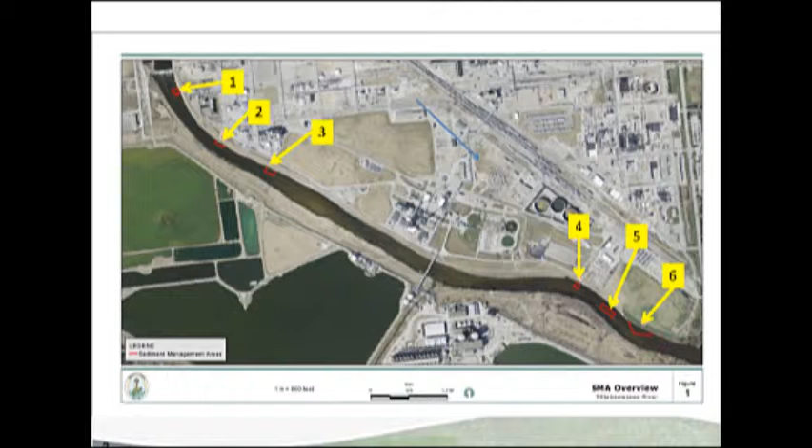There were 6 SMAs, sediment management areas, identified in segment 1 as depicted on this map. For SMA 1, the remedy selection was a cap. For SMA 2 and 3, as well as 6, the remedy selection was DNAPL removal and treatment and installation of physical containment, which was a cap and sheet piling, and then also hydraulic controls. And SMA 4 and 5 were also cap selections.

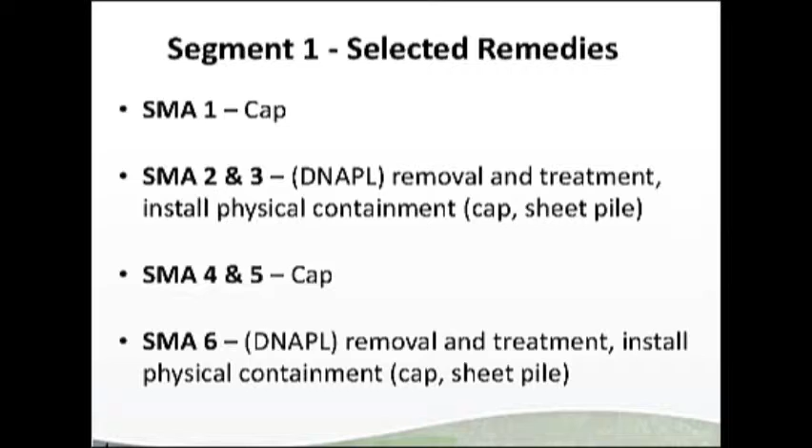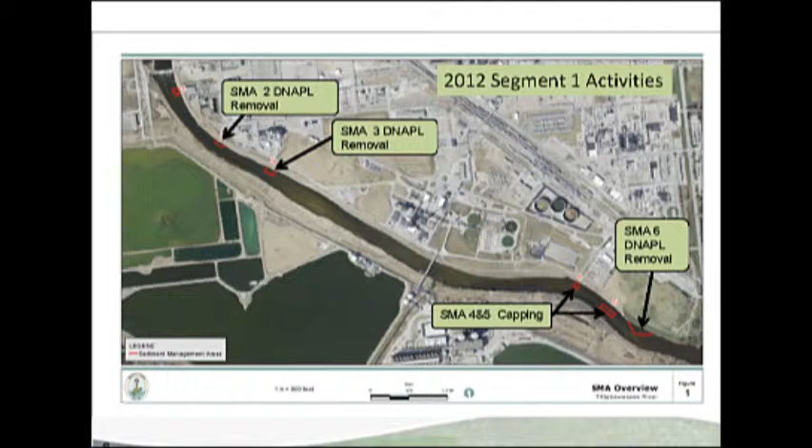So I'm going to talk about the DNAPL recovery first at SMAs 2, 3, and 6. So this map depicts those locations, as well as 4 and 5, which we won't come back to this map. So last year, we went into the SMA footprints and installed a series of wells that was gridded out that covered the entire footprint of the SMA, really evaluating for the presence of DNAPL.

If DNAPL was identified, additional wells were installed at a tighter grid, up to 10 feet by 10 feet in those locations. The wells continued to be installed at that tighter grid until no more DNAPL was encountered. And then product recovery was put into operation, typically at a daily frequency, and in some wells, if we were able to recover them quick enough, we would pump more than once a day. So we would be pumping and removing the DNAPL from out of the sediments.

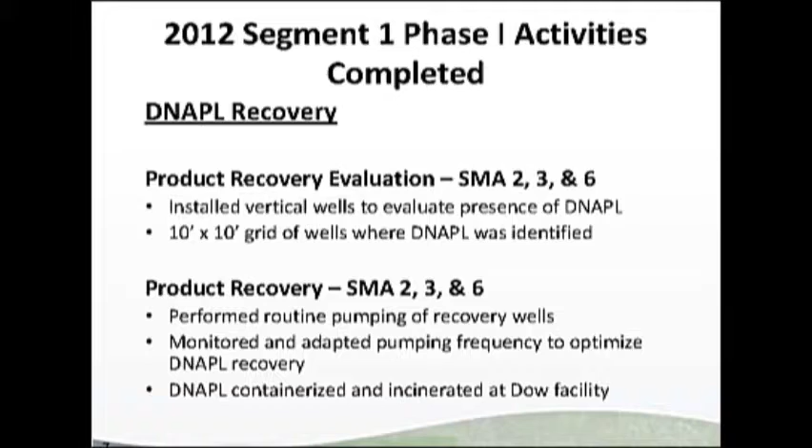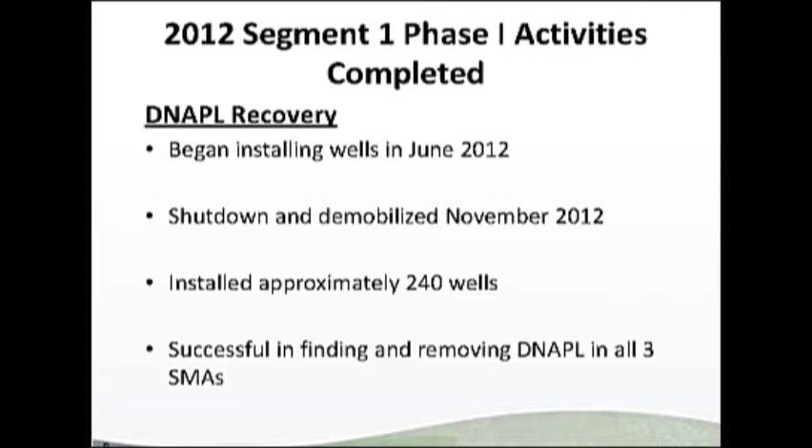We began installing the wells in June of last year. It took us a little bit longer to get going. This year we're actually in the water working already. We worked on the DNAPL recovery until the end of November when we demobilized, basically because of weather conditions. 240 total wells were installed, and a number of those actually produced DNAPL. In all 3 SMAs, we were able to remove DNAPL.

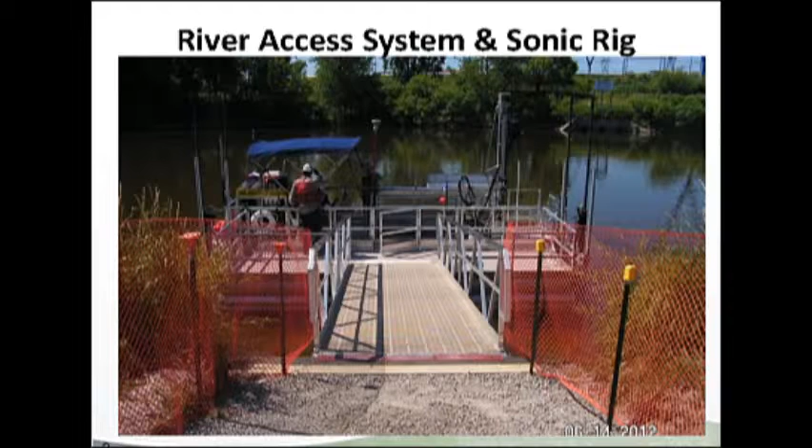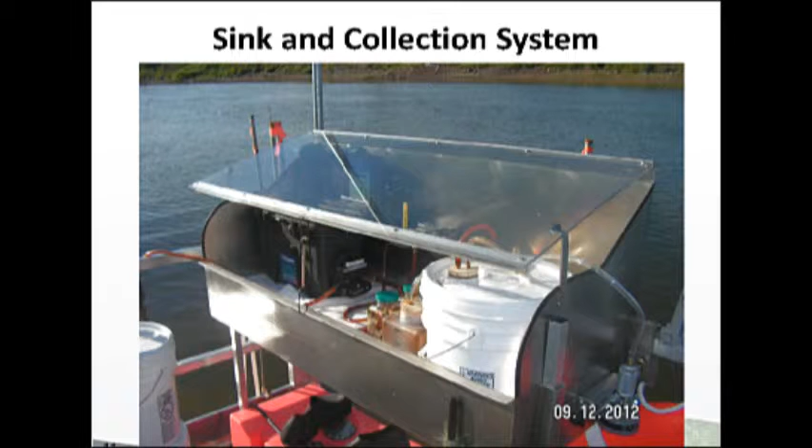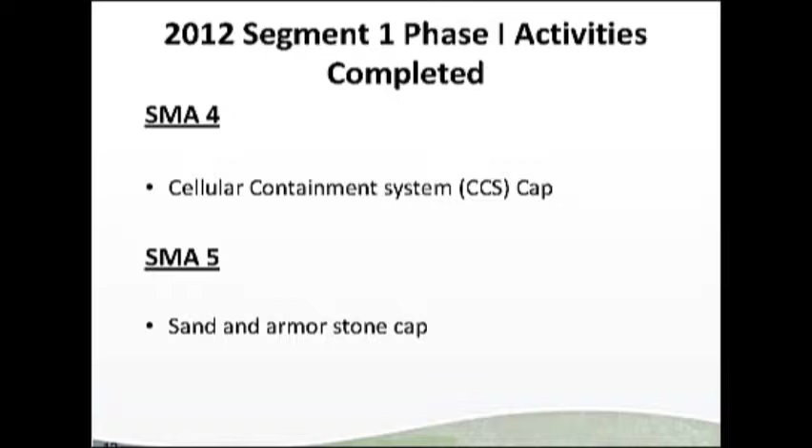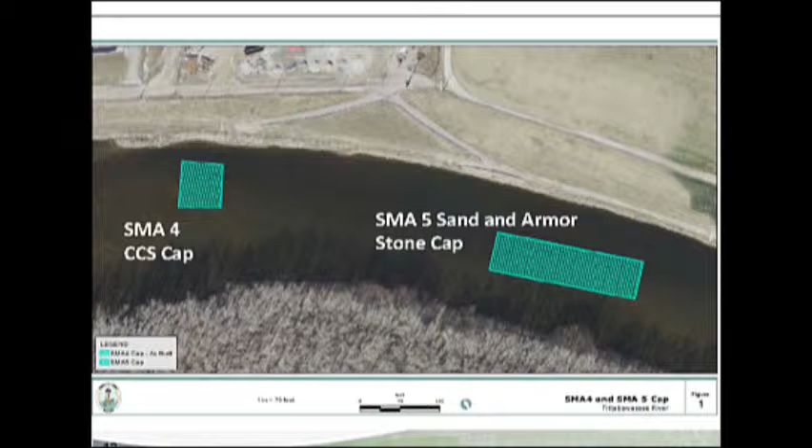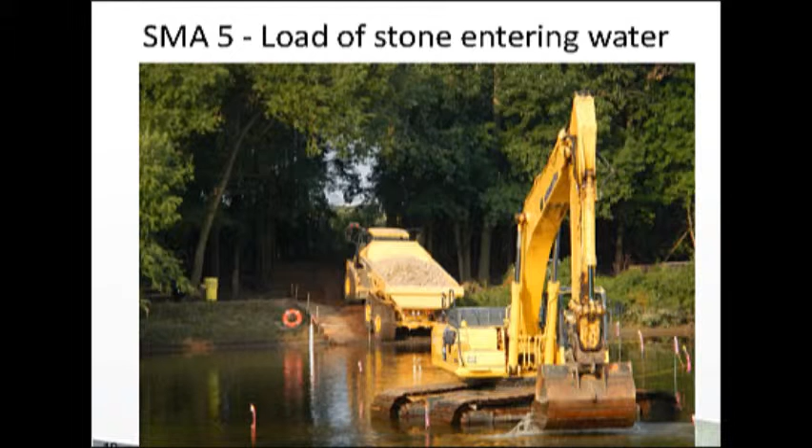SMA 5 was a more traditional sand and stone cap. You can see in this picture we had to basically bring a road in and install a road into the river and on the bottom of the river using crane mats so that the equipment could get in the river and actively move around the footprint to put the sand and stone down. There's a picture showing the off-road truck backing up to the excavator, where he would then pull the stone out of the back of the truck and then spread it out over the footprint.

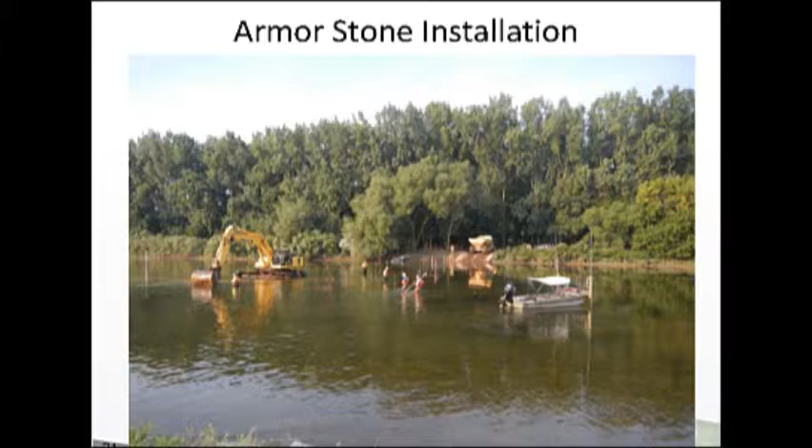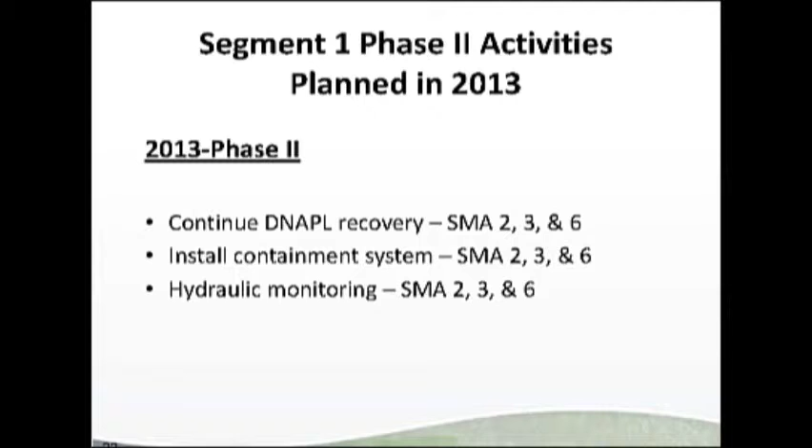Okay, so that's just a real quick recap of what we did last year. In 2013, our plans are to continue the DNAPL recovery in SMAs 2, 3, and 6, and I'll get into more detail in a few minutes. Install the containment systems at 2, 3, and 6, and also implement some hydraulic monitoring at those locations. So this shows you where SMA 2, 3, and 6 are.

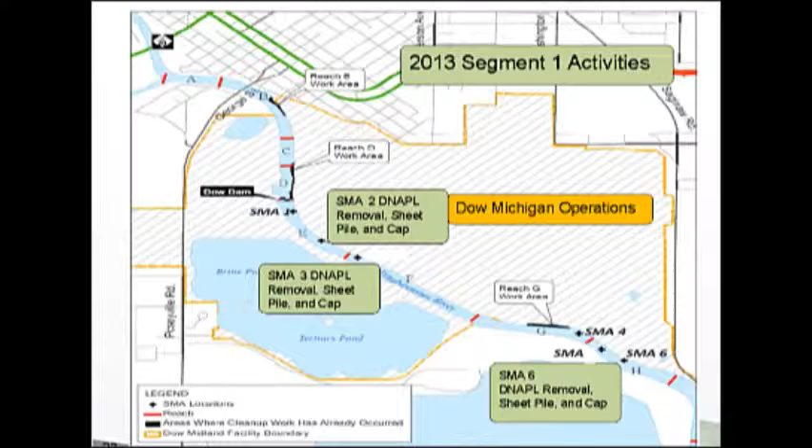So for the DNAPL recovery, which has already started, we will install a series of wells again at the locations where DNAPL was identified through the efforts last year. We won't be spending the time out there searching for it. We've got it very well mapped out with GPS coordinates where we had identified and found the DNAPL and were performing DNAPL removal last year. We'll go back to those locations.

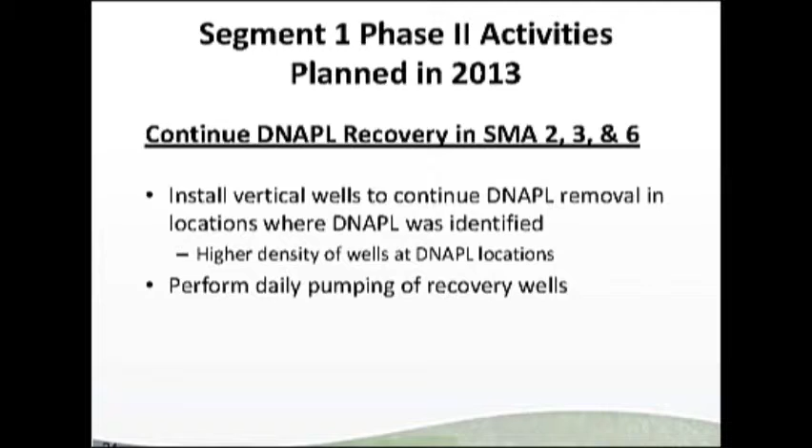We are putting in wells at a higher density, so they're 5 foot by 10 foot. We still need to have room to get the boats in between them, but we are putting them at a higher density in one of the locations so that we can remove more material in a shorter period of time. And these will be pumped on a daily basis.

We started site mobilization and setup on April 30th. Well installation started on May 13th. We were about a week behind our target due to the high river levels that we had this spring, and they continued to be high into early May. In SMA 2, all of the wells that are going to be installed have been installed, and the DNAPL recovery is in progress, and we're currently working on SMA 6 to install the wells in SMA 6.

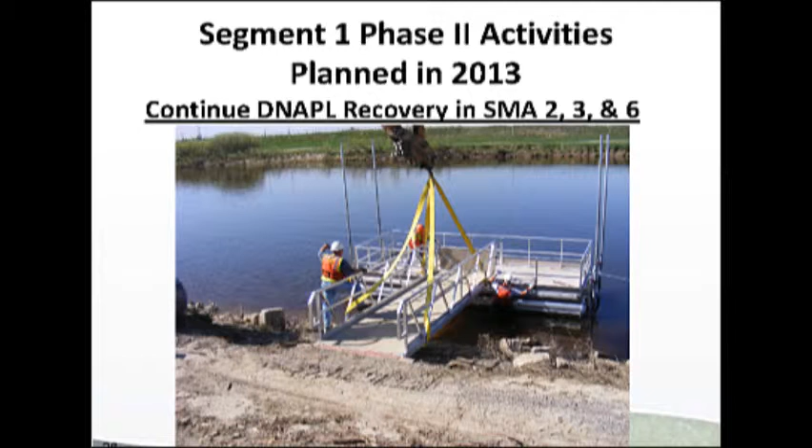This is a picture from a couple weeks ago when they were installing the access point and the docking system. This is another picture of the drill rig this year, and another picture of the drill rig.

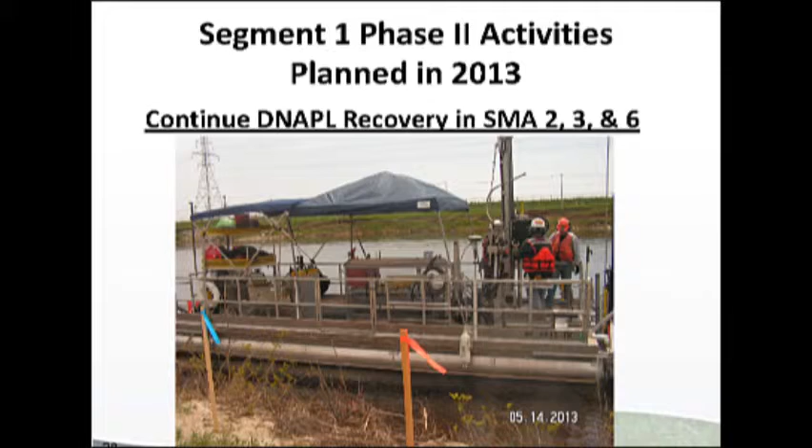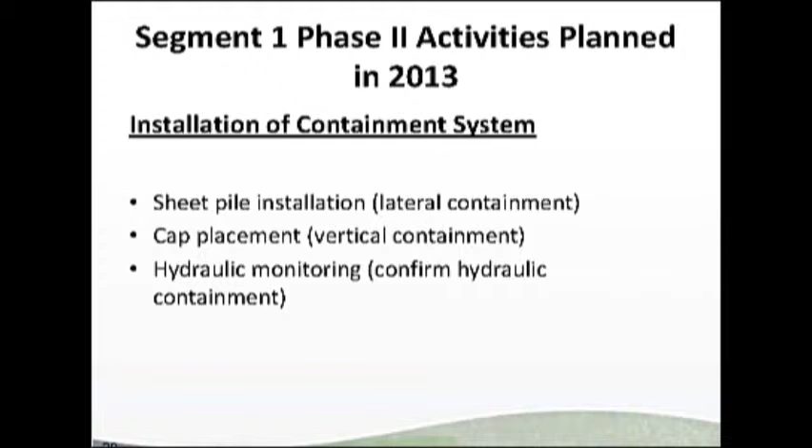The installation of the containment systems. The containment system will come after the DNAPL recovery is completed, and it consists of sheet pile installation around the perimeter of the SMA for lateral containment to isolate the material and keep it from moving within the sediments. A low permeability cap will be installed; this is for vertical containment. And then there will be hydraulic monitoring performed to determine whether or not we have maintained or met our goals for hydraulic containment of those SMAs.

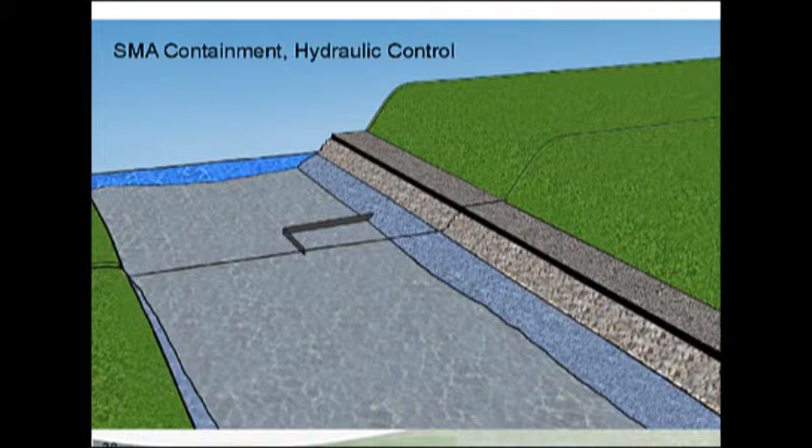These were some pictures we shared a while ago when we were still looking at the different remedy options. If you look at that dashed line as the footprint of the SMA, and you have to view this as if you can see through the water to the bottom. So sheet pile, they're not quite that wide when they go in, is installed basically around the perimeter, and it's tied into the existing sheet pile that runs along the shoreline, which is the RGIS sheet pile here. So it provides this lateral containment system on all 4 sides of the SMA.

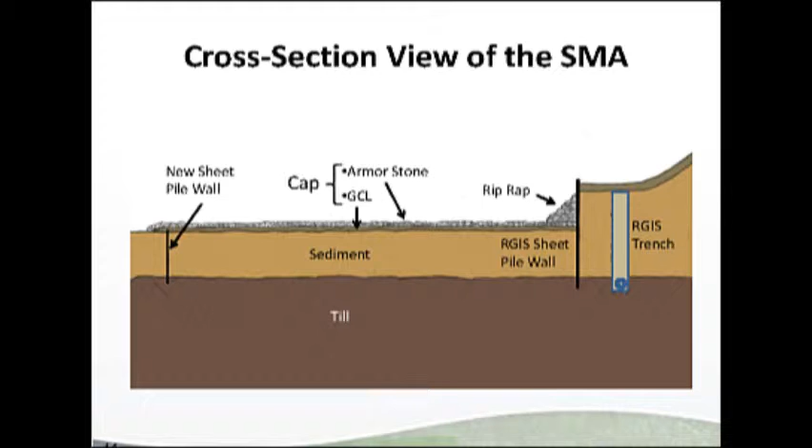Riprap exists there now. I skipped this. That riprap will be removed so that the cap system can be installed all the way up to the RGIS sheet pile, and then the riprap will be reinstalled.

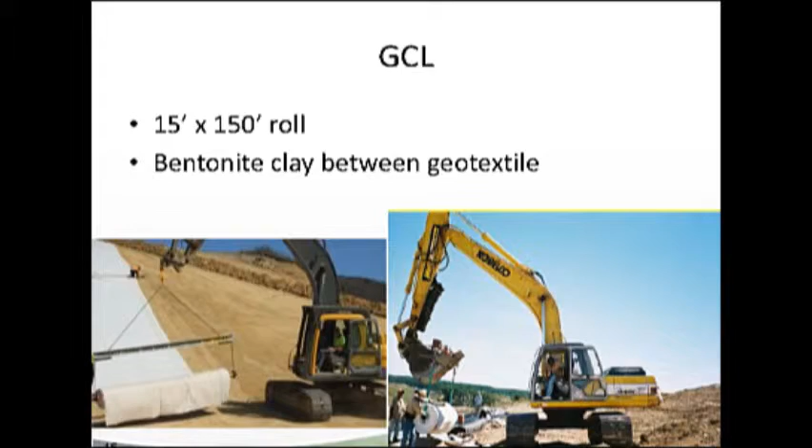The GCL, which is a geosynthetic composite liner, I always thought it was called clay liner, but Kip corrected me today, comes on a 15-foot by 150-foot long roll. It's only about 1/4 of an inch to 3/8 of an inch thick, and it's got bentonite clay sandwiched basically between geotextile. And the bentonite clay, when it gets hydrated, becomes very impermeable and basically doesn't allow water to flow through it.

And these are some land photos of the clay liner being rolled out on land, which we're going to be doing in the water. Here's a view of a liner being installed in the water. So it gets rolled out across the water and then gets weighted down to the bottom, so they'll set on the bottom of the river. Then after the GCL is laid down, it will be covered with armor stone to basically hold it in place and protect it from erosion.

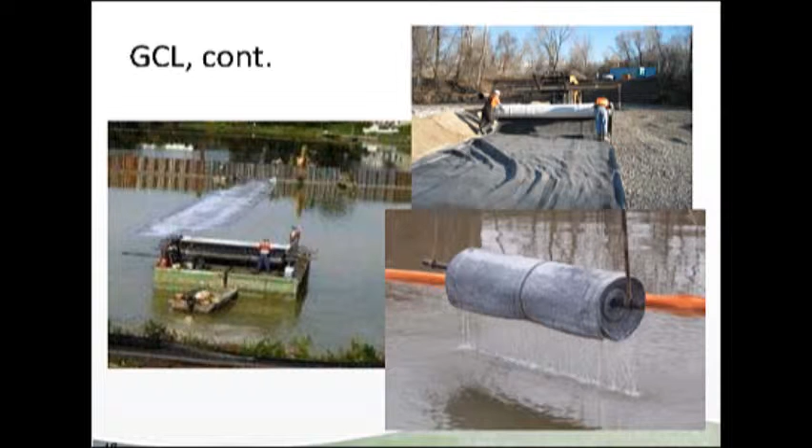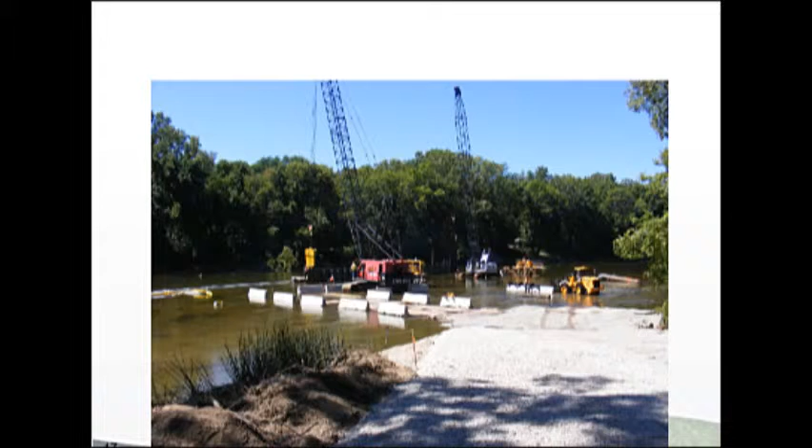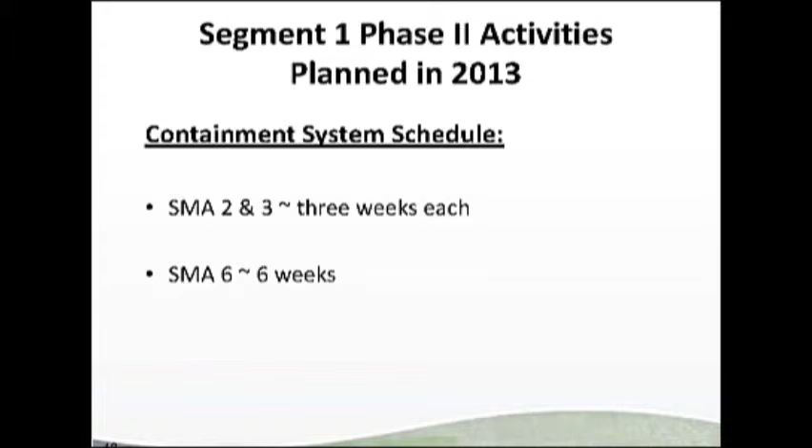For the installation of the containment systems, each SMA2 and SMA3 will take about 3 weeks to install the sheet pile and the caps, and SMA6 will take about 6 weeks because of the footprint size. And I believe that's it. If there's any questions? Yes?

Manning, in view of the flooding event we had back in April, and all the debris going down the river, was that disrupted at all? Yeah, well, it was probably all filled in. According to our monitoring, we were monitoring it through the year last year, and it was pretty much all filled in by December when we quit monitoring because of weather conditions.

We were asked by the agency to kind of do an inspection of it. We have routine monitoring that we're going to be doing on our caps. It's part of our program. But we did some spot inspections last week of all of the caps, not just the CCS cap, but also the armor stone caps, and everything checked out to be fine.

Right. What are the predicted half-lives for these, and what's the basis on making those predictions? The half-life of what? These mats. How long you predict that they're going to last, and what the predictions are based upon. From my understanding, as long as they're covered and they're not exposed to the sunlight, the material will last an extremely, I don't know what the half-life answer is, but it basically will stay there indefinitely.